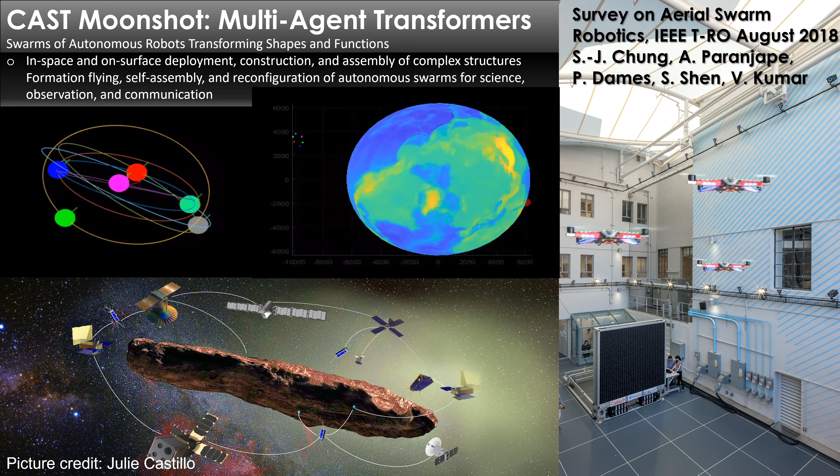Before I talk about the main topics, I'm going to briefly talk about my spacecraft swarm work, which I've been pursuing since my PhD work on formation flying. Swarm here means potentially more than 5 or 10 spacecraft. The number could be large, so your methodologies, algorithms, or autonomy technologies should be scalable to very large numbers, like tens or thousands of spacecraft.

I'm very happy to let you know that we have a potentially breakthrough flight demonstration. It's surprising that we have yet to see any formation flying demonstration involving more than 2 or 3 spacecraft doing full advanced autonomy and control. So we are working actively with JPL and a corporate partner to launch 3 CubeSats using a big spacecraft called Cygnus, by Orbital Sciences, now Northrop Grumman Innovation Systems, which is the main International Space Station supply vehicle.

After the end of the ISS mission, it's going to launch our 3 CubeSats. Along with this Cygnus, the 3 CubeSats will do autonomous reconfiguration using a very advanced computer, because we are not putting in the radiation-hardened computer, which is typically very expensive. Instead, this computer is an NVIDIA system, a very powerful computer with 256 GPU cores and a 2 gigahertz ARM-based processor. It's going to blow anything out of the water in terms of computational power compared to whatever computer you see in space now. It's going to be a real breakthrough technology demonstration. We are very excited about this.

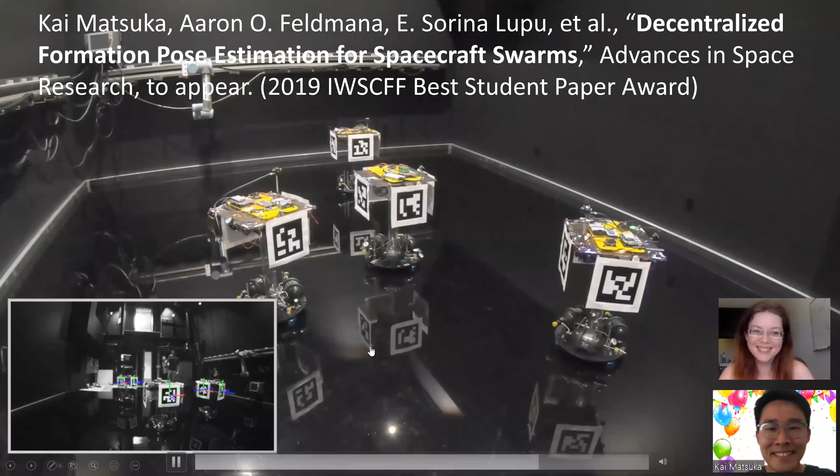So another important aspect of this method, or this project, is to figure out the safe and right path and trajectory for individual satellites, and there is no central agent. You can see that we are running our real-time optimal control algorithm.

Optimal control here means that essentially you have a certain time cost function, an integral of a certain cost function like fuel expenditure over time, while you avoid collisions and various state and input constraints, and eventually achieve the objectives. So my research group's work is kind of the first to use this sequential convex programming to solve very complex real-time optimal control problems involving multiple spacecraft.

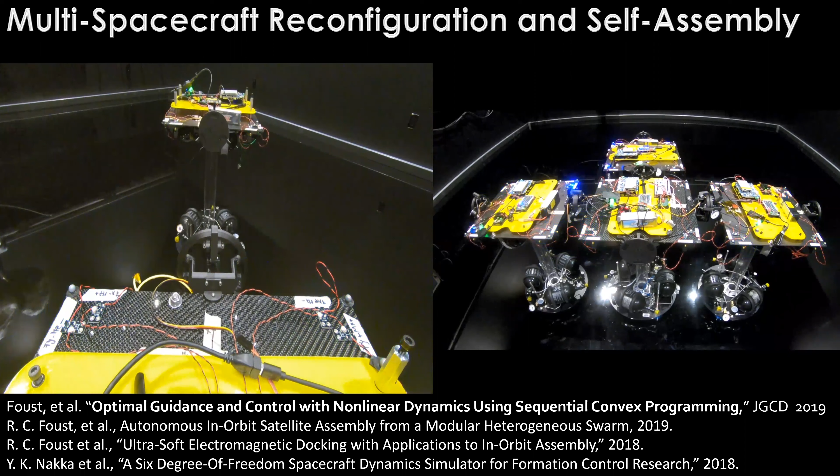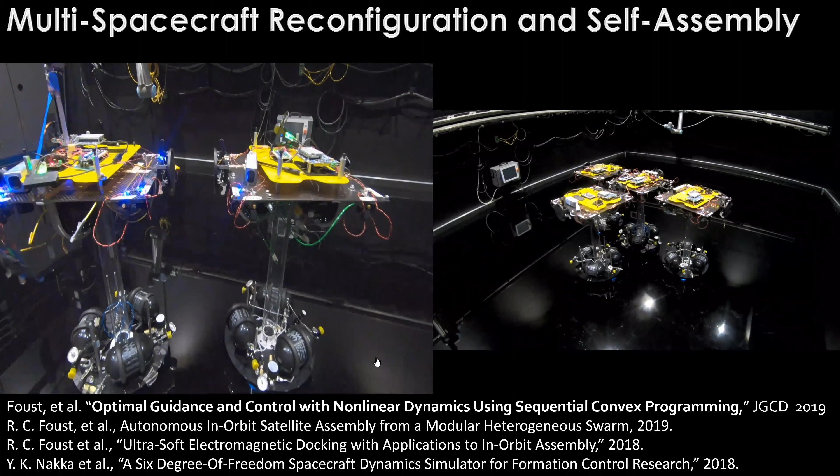We have a number of papers, and recently we extended that to more rigorously include nonlinear dynamics, and we also started working on stochastic dynamics with chance constraints, which I'm going to talk about soon.

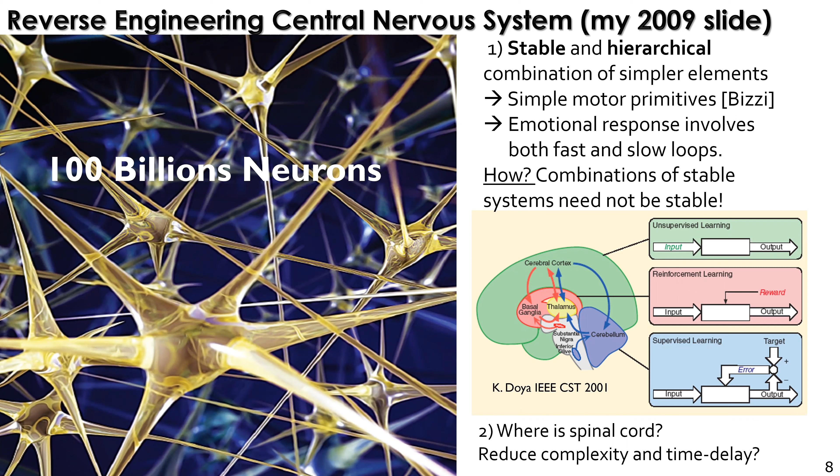So that was actually my point here, and that key idea is a hierarchical combination that can be used to really help this time delay we have. So that's the second point here.

So that led to some of my flapping flight research, because the idea was that at that time, in the robotics community or even aerospace community, everyone was looking at a very simple flapping flight model, not in terms of aerodynamics but mechanical and robot dynamics, where you only have flapping and pitch. It's basically an insect scale model. So what about bats and birds, where they have more than 30 joints on their wings? It's a very complicated mechanical robot, so how are you going to control those complicated joints?

The idea was to reverse engineer the central pattern generator on a spinal cord. That actually led to my Air Force Young Investigator Award and some best paper awards. We developed a mathematical model composed of coupled limit cycles, then used stability theory to prove we could control the phase differences between these multiple oscillators. This is actually the first paper that uses a central pattern generator based controller for flapping flight.

When you have multiple joints, not just flapping up and down, but lead-lag and independent left and right wing control, this still focuses on the philosophy of how you reverse engineer the sensory motor control, or the spinal cord part of the central nervous system, not just the brain.

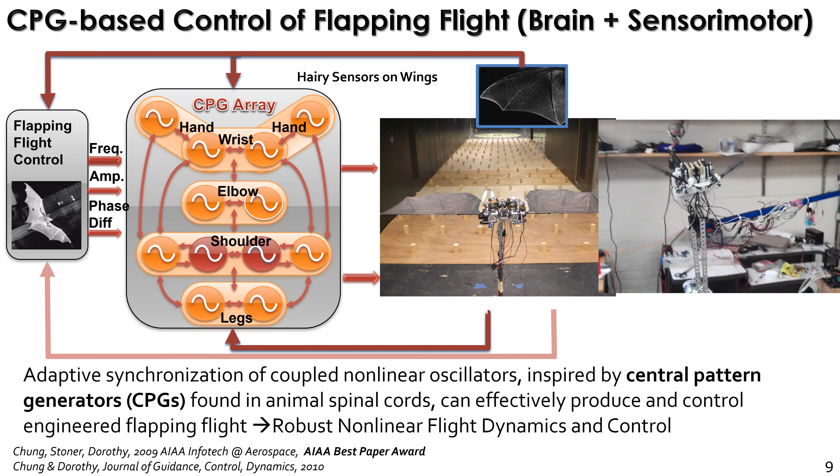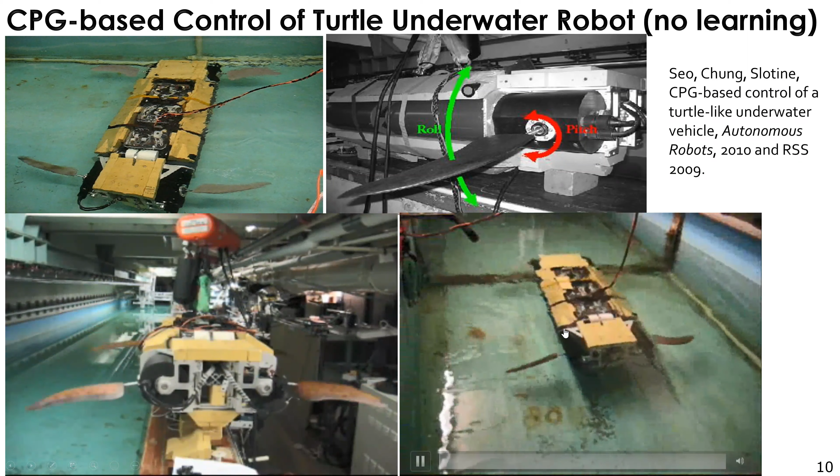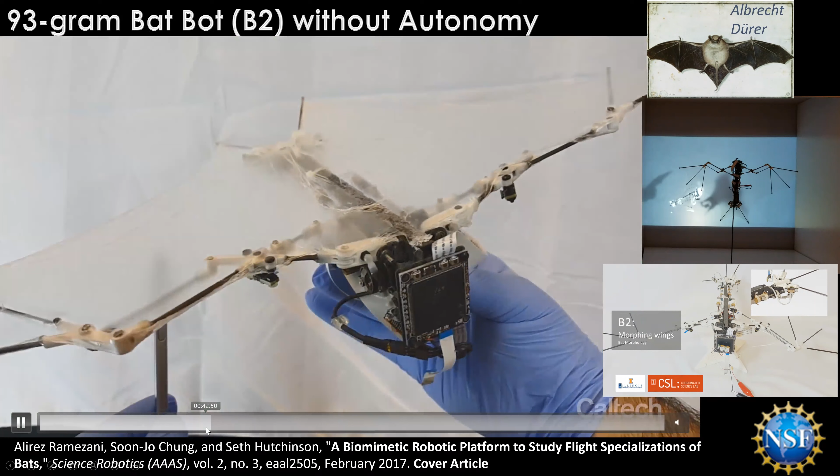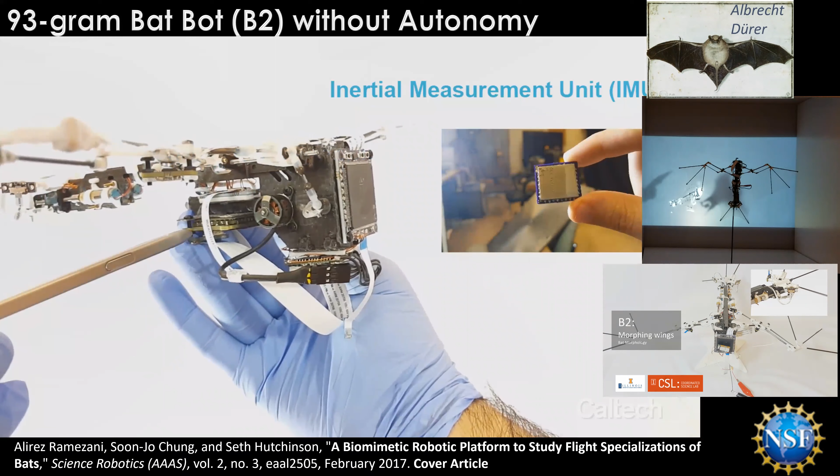So, skipping ahead, the end result is this Bat Bot. We wanted to apply some more sophisticated controllers. This Bat Bot is still, in my opinion, state of the art, because it only weighs 93 grams. It has a microcomputer that can do a low-level control loop, and as many as 6 fully controlled motors with encoder feedback for flapping and wing folding, independent left and right wing folding. That's kind of my culmination of investigating a bio-inspired control approach. We designed a very nice nonlinear controller, but it didn't really have a learning part or a sophisticated autonomy.

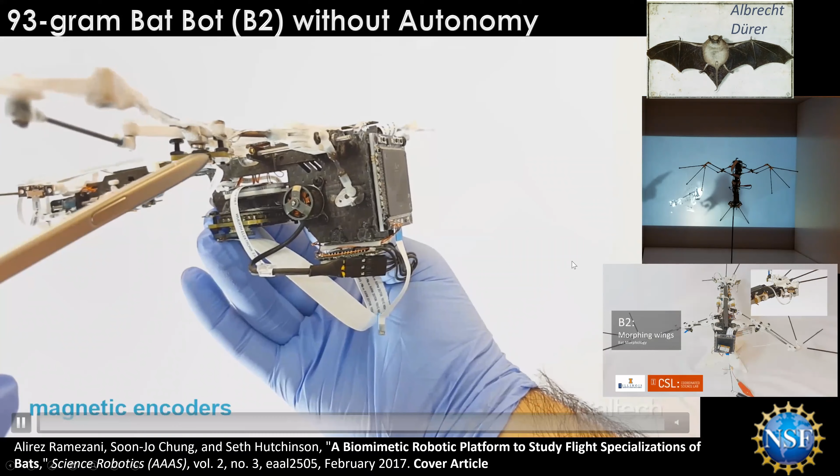I actually wanted to show this one, since we have a lot of fluid mechanics colleagues. With Kenny Breuer at Brown, I was invited to a Spanish program called El Hormiguero, which means the ant, with Hollywood actors, to present our robotic bat.

So this is the old approach. We have a feedback control here, and a plant, whether it's linear or nonlinear, and a separate motion planning. The idea was to design a controller and check the stability, whether you can check the eigenvalues. Checking the eigenvalues is essentially the same as finding the Lyapunov function for a nonlinear system. Then we can have an input-output stability analysis, like LP stability for a linearized system.

So my next step is how can you integrate all these different pieces, and what about learning? This is more of a robust control - you can add adaptive control, but what if you have a certain block, highlighted by G, that's either unknown wind-based disturbance in terms of aerodynamic force and torque, or some unmodeled structural vibration causing additional disturbance entering your system? It could be anything. How can you add learning so that you have both feedback control and estimation, and at the same time motion planning, which typically doesn't benefit from the learning-based process? I'm going to talk about the ramifications of that.

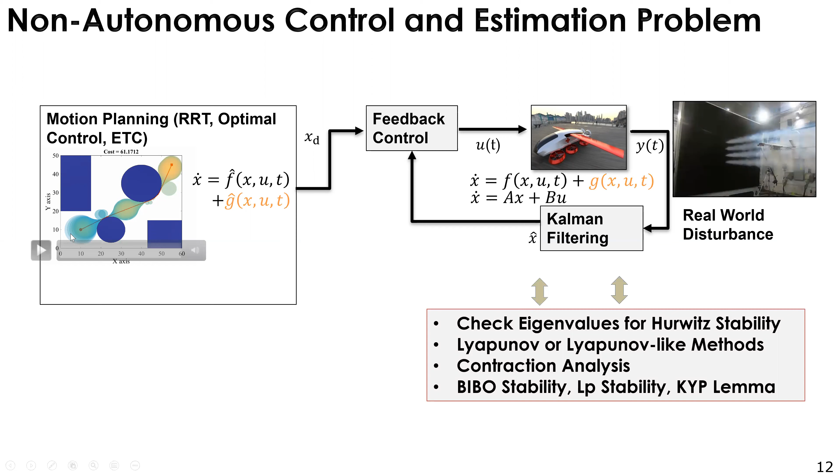So this is my proposed approach, and I shouldn't say my, because this is some of the approaches that we are pursuing along with our CAST colleagues, and a lot of students are working in some of these intersections.

So there is a learning, offline and online learning block that can help find a better trajectory for motion planning in terms of collision avoidance, safety, and minimizing fuel. Also, you have to have a very stable and safe nonlinear feedback controller. So we are benefiting from some recent updates that can analyze the nonlinear and stochastic dynamics of both the nonlinear control and estimation problem.

Estimation, if you're not familiar with this kind of control theory, is basically figuring out your state, x hat, for example. Control is figuring out u, and learning is about whatever parameters, disturbances, and unmodeled errors exist in your system—estimating those either in real time or offline, and you can combine the two. That's what I'm going to talk about.

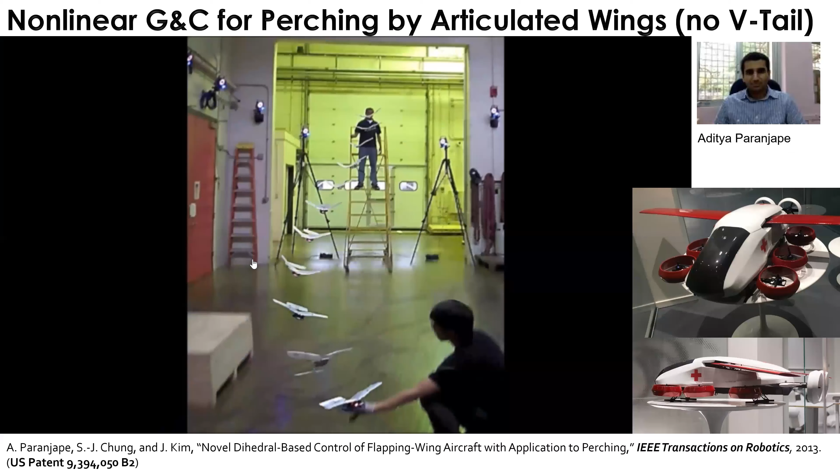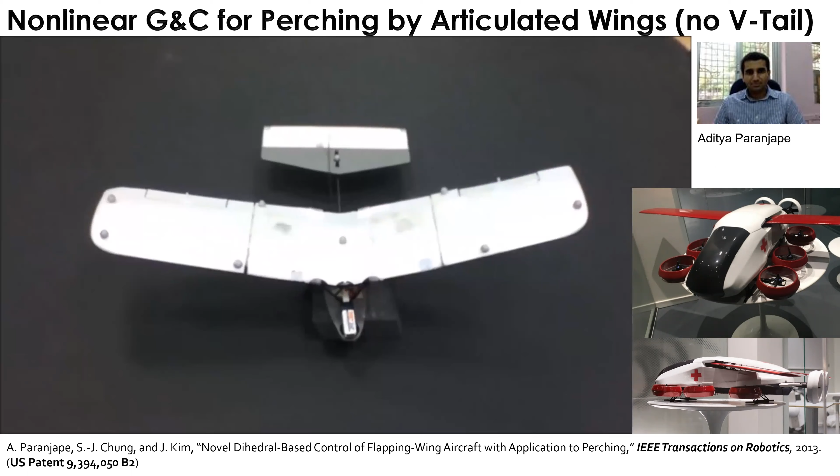The idea is basically dihedral. Dihedral means the wings are angled upward, but you can actually move the dihedral angle and control it. It's like flapping, but not in an oscillatory fashion. If you can control the left wing dihedral and right wing dihedral separately, you can use that difference to generate yaw.

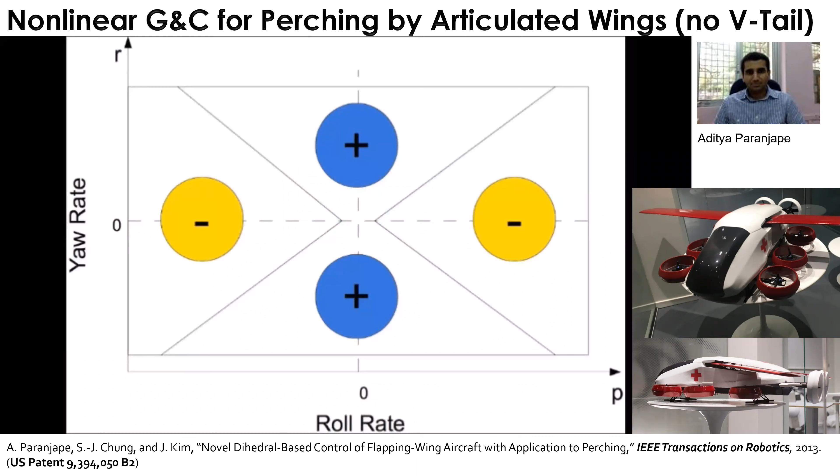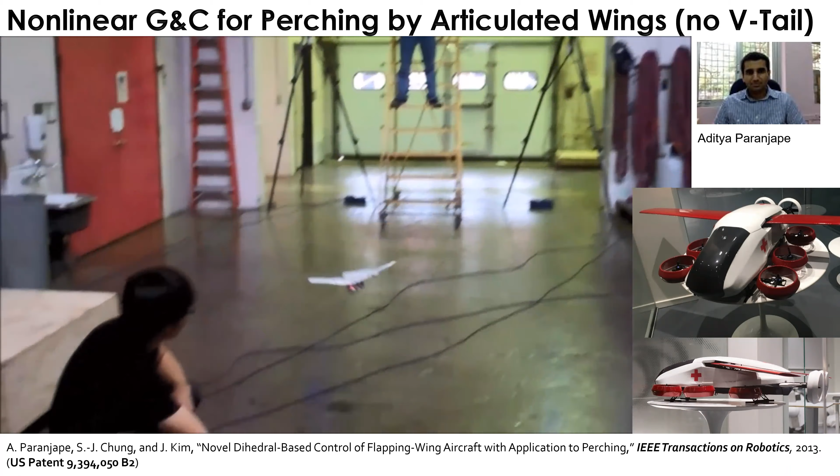So this is actually the first real robotic experimentation and controller demonstration of a vertical tailless aircraft, and then perching—so it can automatically figure out the location, do control, and land gracefully on a human hand.

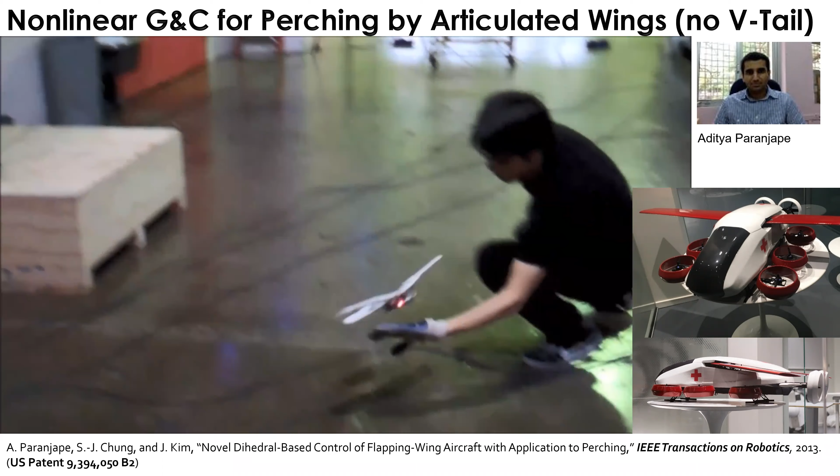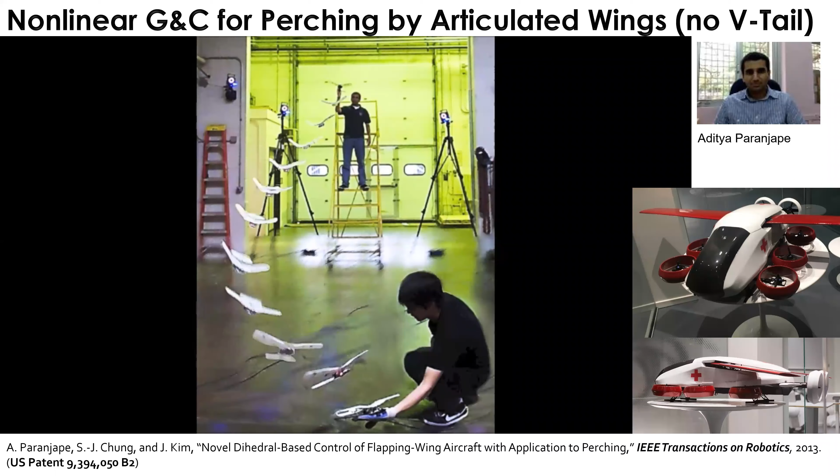This involved very sophisticated control design, combining guidance and feedback control with proven stability. We used a technique called nonlinear dynamic inversion and then singular perturbation to do a hierarchical decomposition. It looks beautiful, but my point is that it really lacked more robust autonomy and a learning-based block, because it didn't try to learn any uncertain aerodynamic forces or location changes of the target.

So how can you add this kind of learning block into this sophisticated nonlinear flight control design? That's something we are pursuing right now.

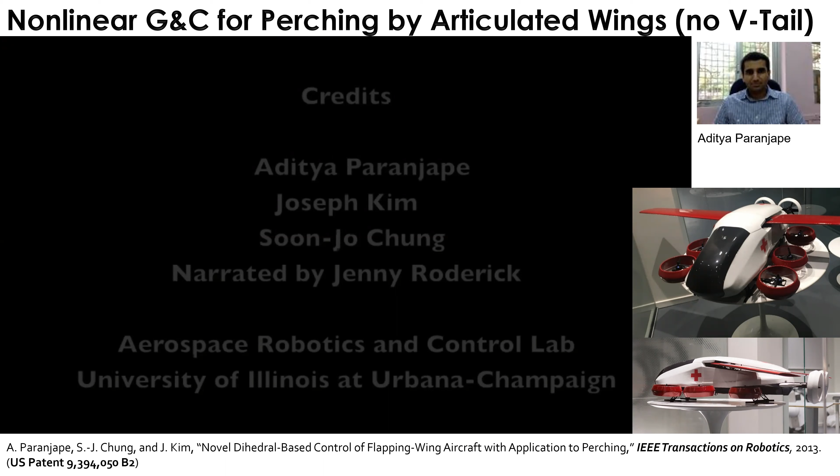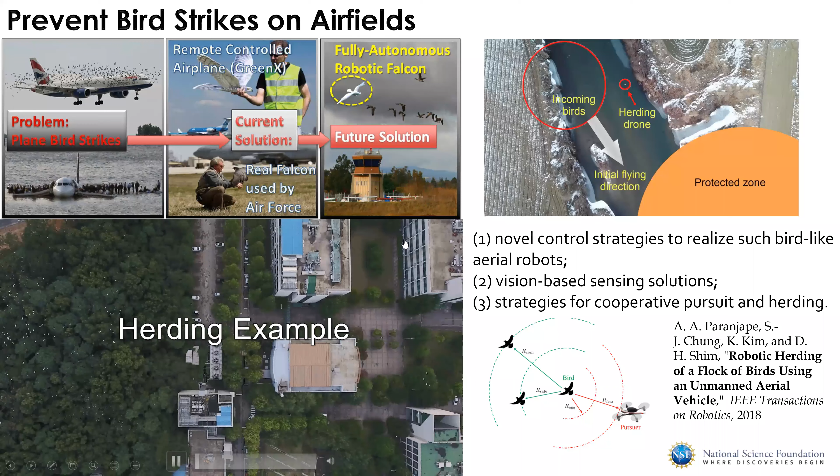So I'm just showing you prior work. I'm taking this opportunity to also talk about swarm and multi-agent systems, either for spacecraft and so on—combining this flapping flight dynamics that I'm now familiar with, and how you control this drone that looks like a bird.

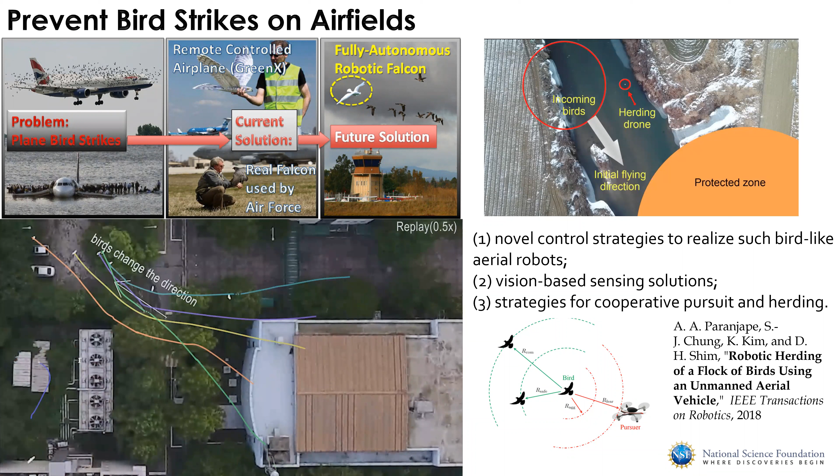We got NSF funding to actually find a solution to herd flocks of birds that tend to fly around airfields, causing accidents. As you can see with the miracle on the Hudson River, they had a spectacular landing because they were lucky, and the captain knew how to do a gliding flight.

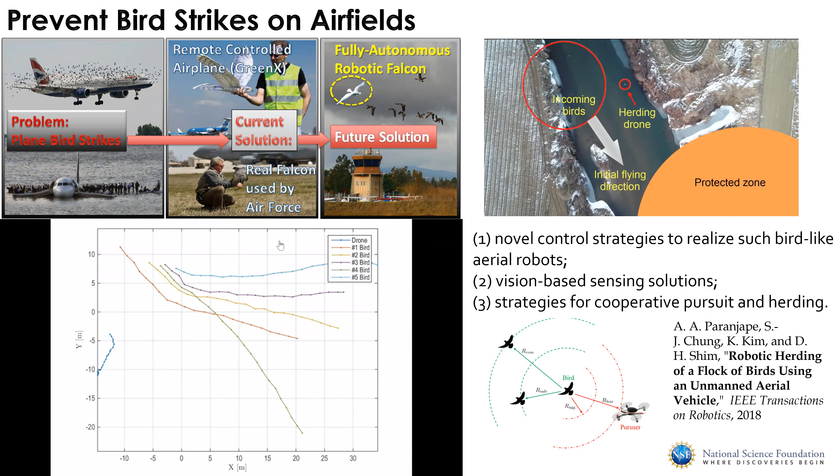So in this paper, we presented a mathematical model of flocking dynamics of birds, and how you can reverse engineer a mathematical model of the flock's behaviors, like cooperation and following leaders. How can you add an intruder to herd the flock of birds in reality? This is the first real demonstration of a robotic drone herding a flock of birds using our mathematical algorithm.

Obviously, I wasn't sure it was legal to do that in the US, so we actually collaborated with an international institution for this.

So going back to the main message: how do you combine these learning pieces for both guidance, which is motion planning, and feedback control and estimation? We are going to start with motion planning, meaning the optimal control and guidance problem. I'm saying that you can use optimal control to solve the motion planning problem.

So the typical way of solving this problem is that you have a cost function, either minimizing fuel cost or energy cost. You can add additional cost functions, and you have highly nonlinear dynamics, input constraints, and various safety constraints, typically like collision avoidance, meaning you have to maintain sufficiently large distance between agents. This is a typical problem: you start from certain initial conditions, and then you typically give a final terminal time set.

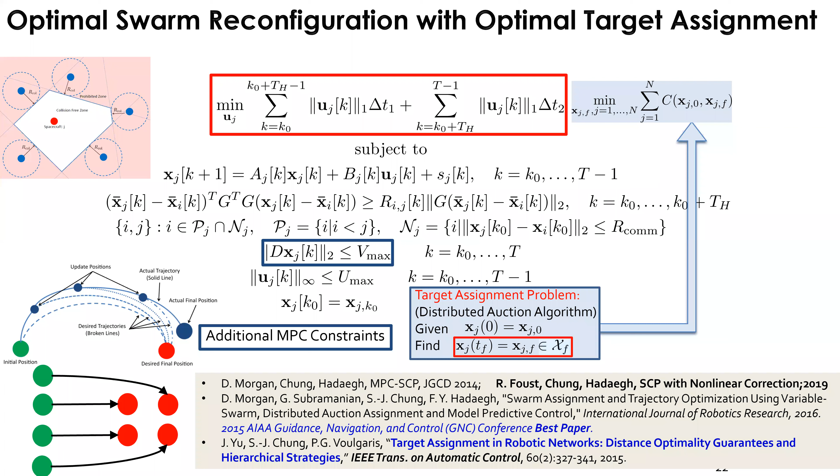We have a bunch of extensions including stability proofs and convergence. One thing to mention is that when you have multiple agents, the terminal constraint is not given — here I mean the target assignment. You can combine that target assignment problem using existing methods like the Hungarian method or game theory-based methods. Basically, for each spacecraft's initial position, you figure out the best optimal terminal point to achieve your goal, and that can be viewed as another optimization problem.

But you have to simultaneously integrate both methodologies of optimal control — basically finding the path. I'll mention this word, path or trajectory, multiple times in this talk. We have to combine these multiple trajectories with the initial and terminal conditions. That's the target assignment problem, and we now have a combined methodology to do that.

One thing to mention is that you are finding the single point, and that's another decision problem. That's actually one example of the hierarchical combination I started talking about.

I talked about the central nervous system and brain, how these complicated machines or animals work, because you have very complicated networks that are essentially hierarchical. They can make fast-time decisions and slow-time decisions, fast-time movements and slow-time movements. So from the theory of stability and dynamics, we have perspectives we can leverage for achieving this hierarchical combination of very complicated dynamics.

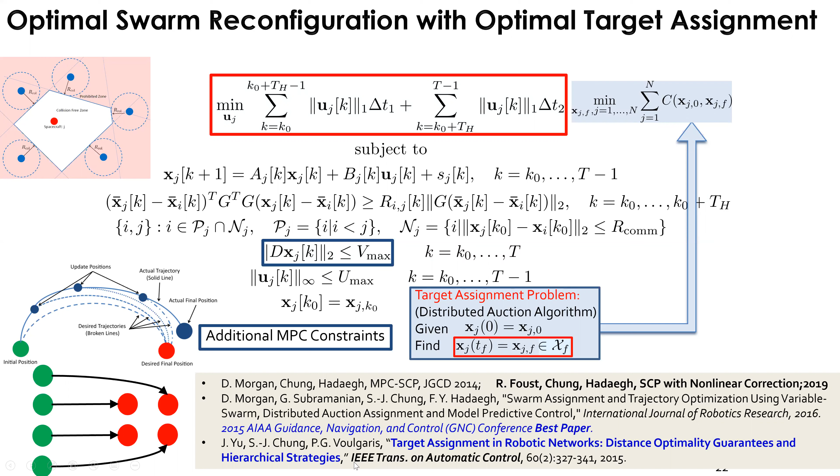This target assignment problem is essentially a learning problem or decision-making problem that can run a little slower, because you only need to figure it out at one time step, the terminal time, instead of many independent time steps between initial and terminal time. That's another example of how you combine learning-based decisions with optimal control, feedback control problems.

The end result is that you can generate many complicated shapes from whatever initial condition, and you can lose some of them — they can autonomously figure out where to go in a collaborative fashion. Those dashed circles indicate communication radius, where you can actually communicate with other agents.

Another extension: in order to make this a convex optimization, but sequential, so you can handle slightly more non-convex constraints or dynamics including nonlinear dynamics, we use hyperplane approximation. You start drawing hyperplanes to avoid collision, but that may be too conservative. So what we do is expand the collision avoidance like spheres, which look like tubes, expanding tubes. You can then define the collision-free, safe region.

Again, this is illustrative — you're moving around a very cluttered environment, and you want to figure out the best optimal collision-free path. Then you can use a heuristic approach like RRT or tree-based approaches to find a certain path, and then start expanding spheres along that path. Using the dynamics, sequential convex programming, or an optimal control solver, they can guarantee feasibility and dynamics constraints, satisfying the optimal solutions.

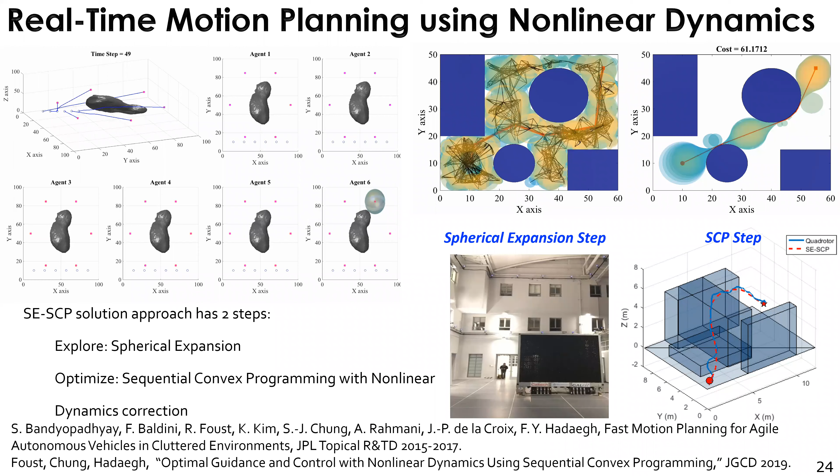So here I'm going to talk about how we can add a learning part. One extension is that I only talked about deterministic nonlinear dynamics. Again, if you actually add nonlinear dynamics—I'm not talking about the stability problem—you have an optimal control.

The typical way of doing that is you linearize the nonlinear dynamics, but you do that sequentially. You start improving the linearization errors, but there's no way you can actually handle nonlinear equality constraints, because a nonlinear equality constraint means it's non-convex, right? So there are several extensions of doing that using the nonlinear correction paper.

So what Yashwanth did was look at how you actually use both stochastic nonlinear dynamics and chance constraints. Now your collision avoidance constraint is formulated as a chance constraint—a probabilistic constraint. So what's the chance or probability of disobeying or violating this particular collision constraint? You write that as a chance constraint, and then solve this very complicated optimal control problem by turning the stochastic differential equation into a deterministic nonlinear equation using polynomial chaos approximation.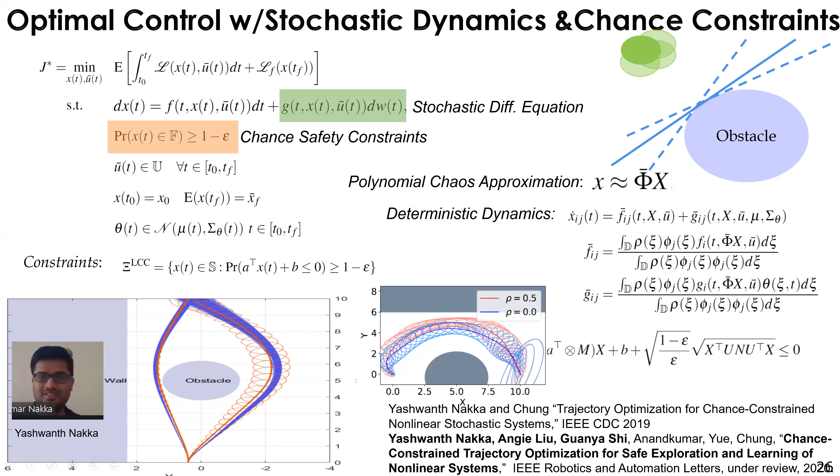So now I'm talking about a new application, before I go into some of the theory here.

This is a flying ambulance, and it's also one of the most important moonshots. When I luckily got involved with CAST, I looked at all this exciting research going on in various aerospace institutions, and then tried to figure out what's the next step.

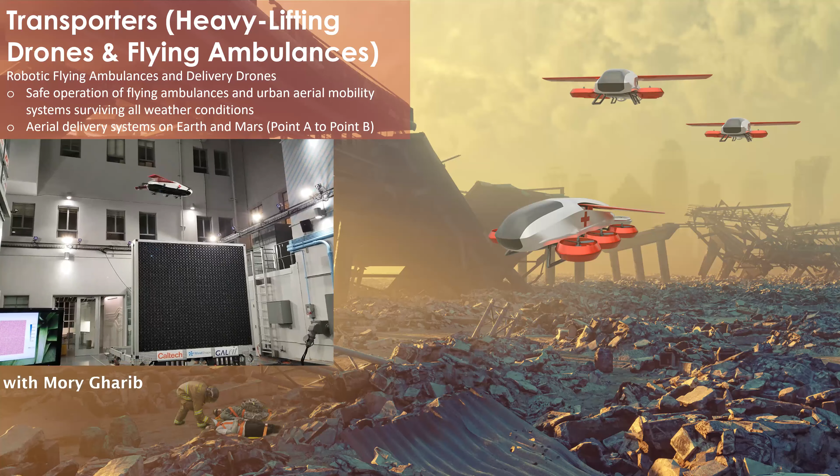We have drones with wings, we have a bunch of quad rotors, and we have helicopters. So I thought maybe, by building on advances in electric motors and drones and multiple propellers, you could combine the wings and distribute the propellers so you can get more range than just quad rotors, and also it's much safer than conventional single-rotor or double-rotor based helicopters—you might recall the very unfortunate and sad crash of the Kobe Bryant helicopter.

Helicopters are well known for unreliability, because you essentially have to rely on a single rotor or a couple of rotors for safety. Here, the objective is that instead of having these kind of meat grinders, you have distributed propellers that can actually get you safety—how you connect point A to point B safely, either delivering packages or even humans.

Under any weather conditions, we basically benefit from this very fancy 1,296 computer-fan-based fan array to generate all these different sorts of wind disturbances.

So I want to reflect on why flying cars - the fast flying ambulance is one example of flying cars. The idea here is that I wanted to actually contribute to AI and autonomy of self-driving cars, and this is an important problem. But if you know how to find a solution to make these autonomous flying cars, I thought that could also be applied to self-driving cars.

But more importantly, I don't know when we can have fully autonomous car networks, because eventually you cannot completely get rid of humans - the pedestrians and cars driven by humans - and that's going to cause a lot of problems. Although you might have very advanced intelligent cars driven by autonomy engines, you might still get into conflict with cars driven by humans. So why don't you actually try to utilize the three-dimensional world? That's one motivation for self-driving flying cars instead of self-driving cars, where we can do a lot of autonomy-based research in the aerospace world.

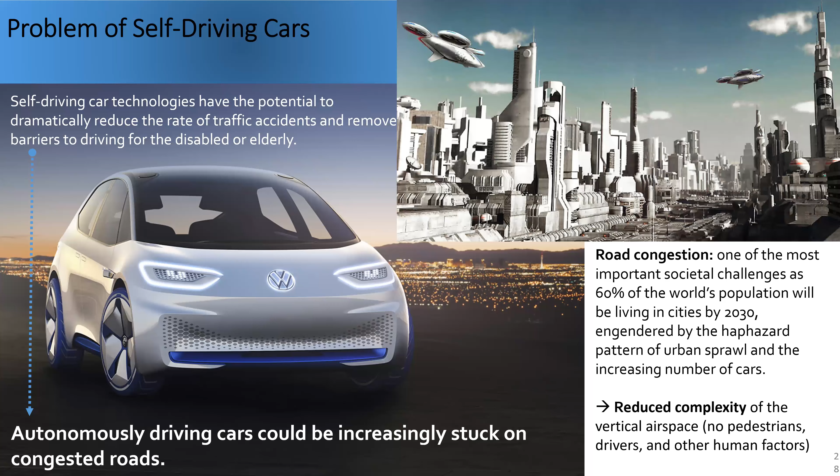So our vision is to develop drones that potentially have multiple propellers for robustness, and might also have multiple hybrid actuators and control surfaces from the wings. Then you have to have autonomy that can connect point A to point B, delivering certain packages. But do you have any delivery drones that can survive any weather conditions? We don't - try flying a drone in heavy wind, it's still very challenging. Once you start carrying a human passenger, you want to make sure your drones are extremely safe and robust. So we're going to show some of our CAST and machine learning and control research problems, and how they relate to solving this kind of autonomous and safe drones that can even carry humans.

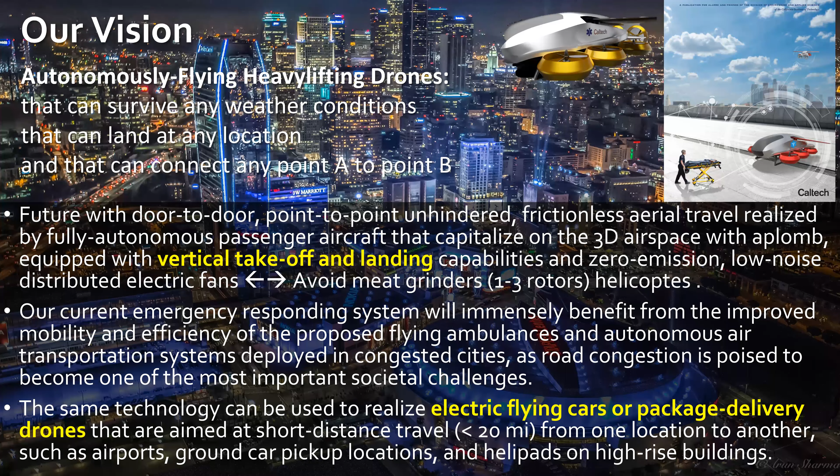One problem is that with multiple propellers, we know the aerodynamics - the thrust coming out of the propeller is proportional to the diameter to the fourth power, whereas this is proportional only to motor speed squared. So I can see the benefit of expanding or increasing the rotor size, and we might end up doing that, but we want to make sure each rotor blade is less harmful, less intrusive - it's not going to be a meat grinder.

At the same time, have you known that if you fail one random propeller out of a hexacopter, it can easily destabilize the system? So you need a certain configuration - either tilting or a certain right controller. So we are demonstrating a fault tolerant controller that can restore stability in the presence of random rotor failure. That's only possible with multiple rotors.

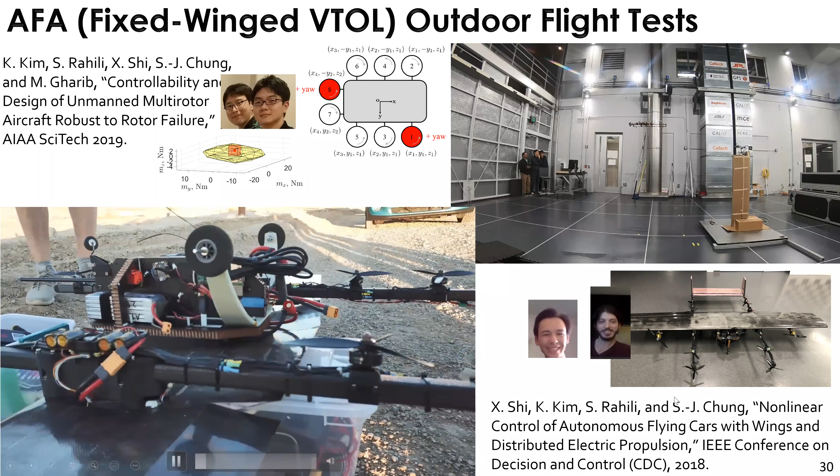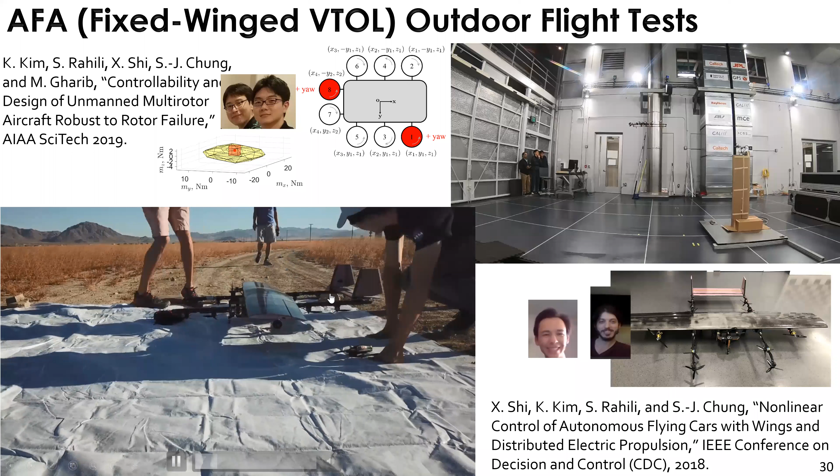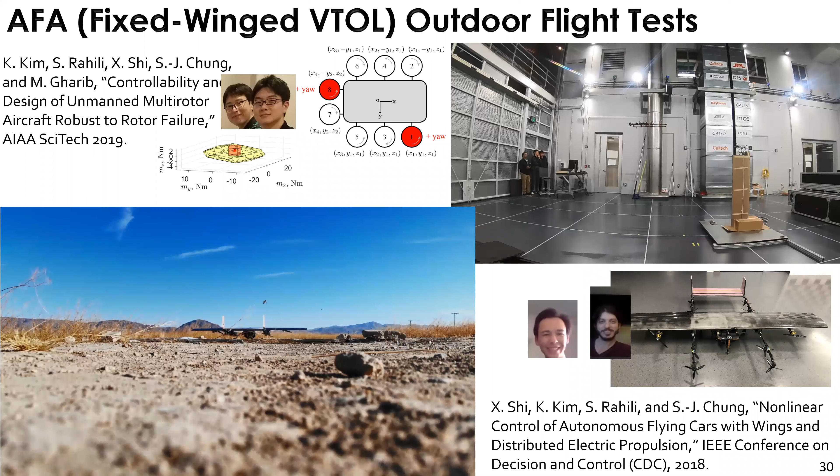You know it's illegal to do that because you have to maintain line of sight. You can see this kind of mini car in the video - we borrowed the car, and people including Reza Nemovi and Patrick were following the drone to maintain visual line of sight. We fully demonstrated this transition flight, going from taking off and hovering, to flying like a fixed wing, and coming back.

So that's one of the technologies, but obviously that was happening in very benign weather conditions with no uncertainty - we had a relatively controlled environment. So how can we actually improve this kind of robustness, and what if it's carrying unknown mass, unknown heavy mass? Then you have to make sure you can accommodate this kind of change in your model. So that's roughly the problem.

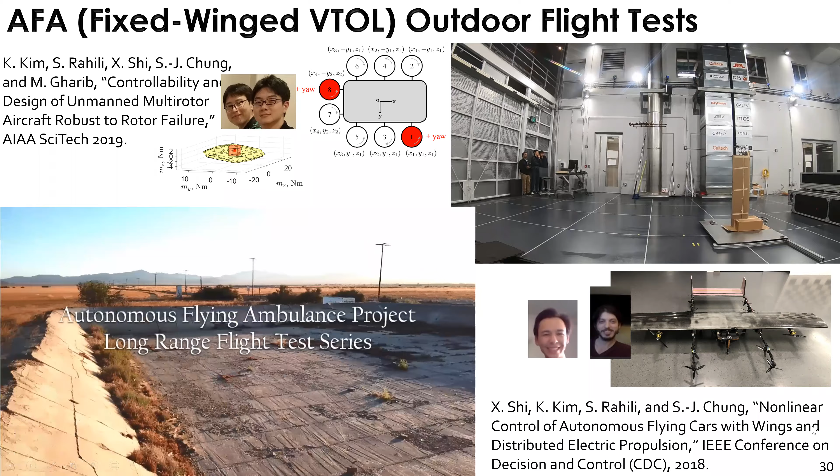So this is kind of an evolution of our previous flying ambulance model, including some of the recent autonomy testbed. I have to acknowledge that some of the earlier designs were done by Kyunam, my PhD student. And we are currently working on AFA 4.0, which improves on all the lessons we learned out of this exercise.

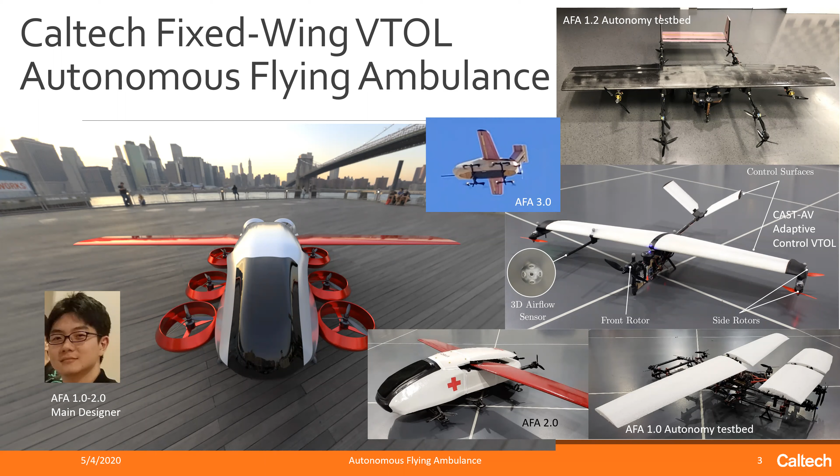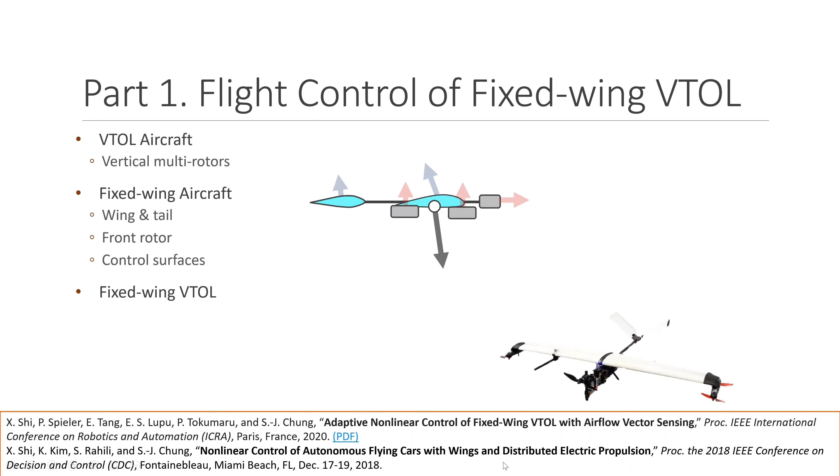So again, some of the control problems, we have to figure out this transition flight. If you recall, is it Osprey, the Boeing tilt-rotor aircraft? Many of these challenges of this kind of VTOL with a fixed wing are caused by this transition flight and instability.

So we have a number of algorithms that can actually handle stability so we can do a very smooth transition. This VTOL fixed wing example is actually a collaboration with AeroVironment and Phil Tokumaru, who is a GALCIT PhD under Dimotakis. Our students actually developed a 3-dimensional flow sensor that can measure the angle of attack, the flow speed, and side slip angles.

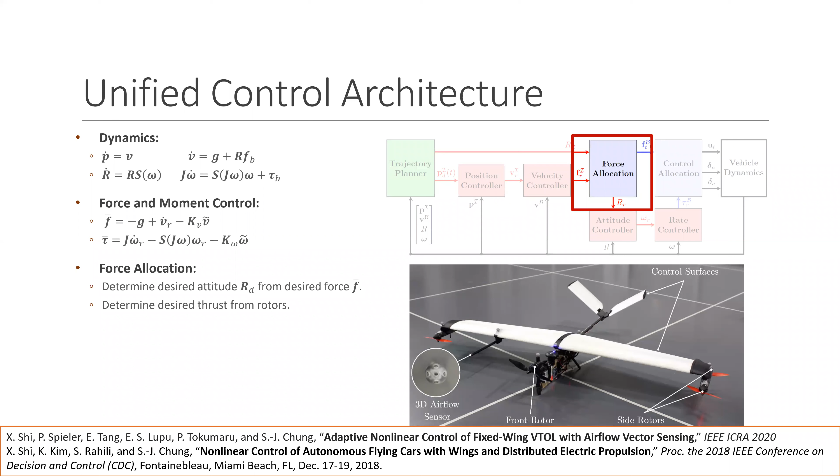Once you measure those, that's fine. You remember this, like the Boeing accident, the crash - you can measure angle of attack and so on. But the thing is how you want to measure and incorporate this measurement, not just angle of attack but side slip angles, and then use that for learning-based flight control. That's what we did here.

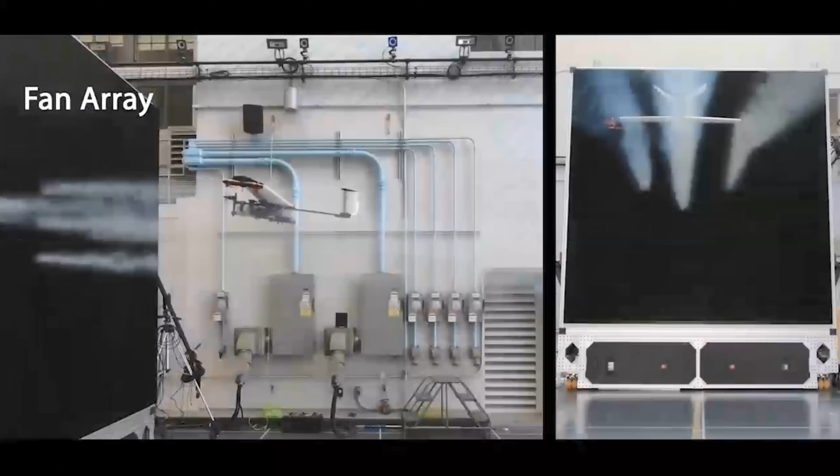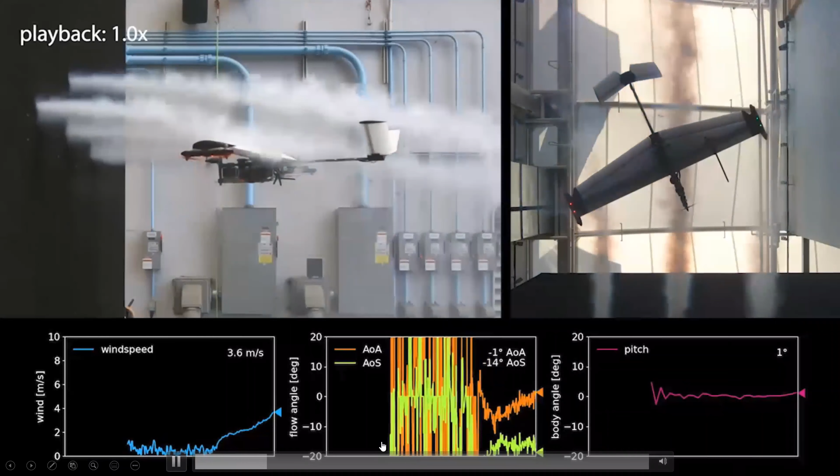So we are trying to adapt these learning-based flow measurements that can lead to real-time learning. Here, instead of a full-blown learning-based method, we are only using adaptive flight control. But this is quite promising in the sense that it can handle various kinds of disturbance.

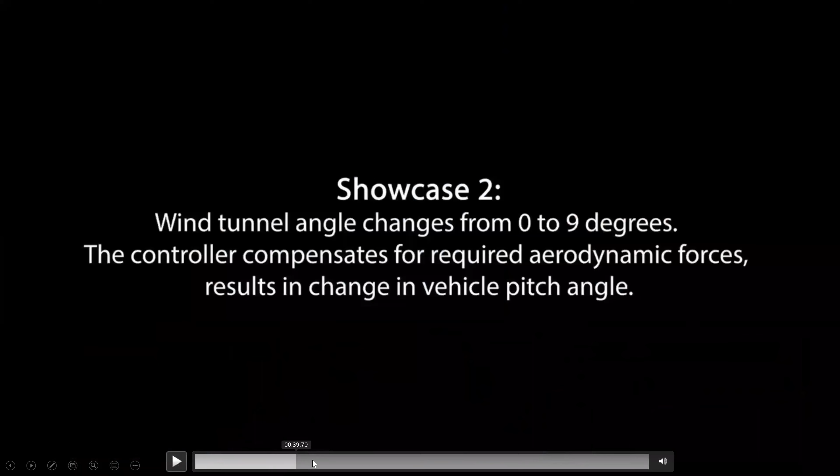In order to actually generate this disturbance with varying speeds, because we don't have that capability yet, they came up with the idea that they can change the tilt angle - you can see that, right? Thereby actually changing the flow angle around the aircraft.

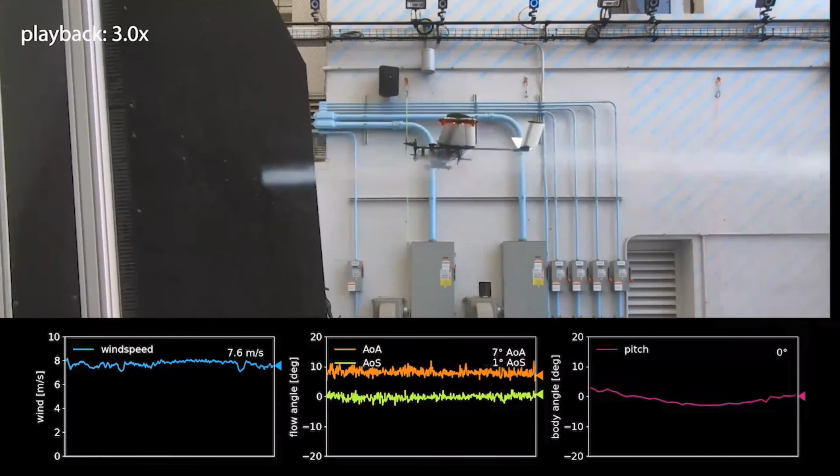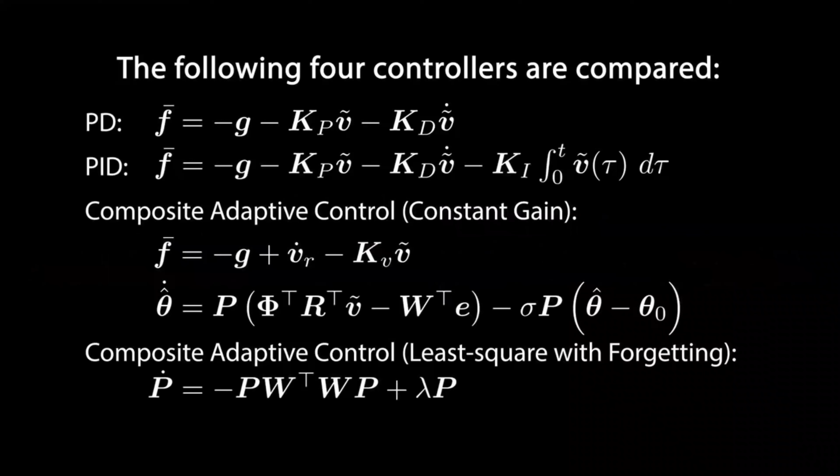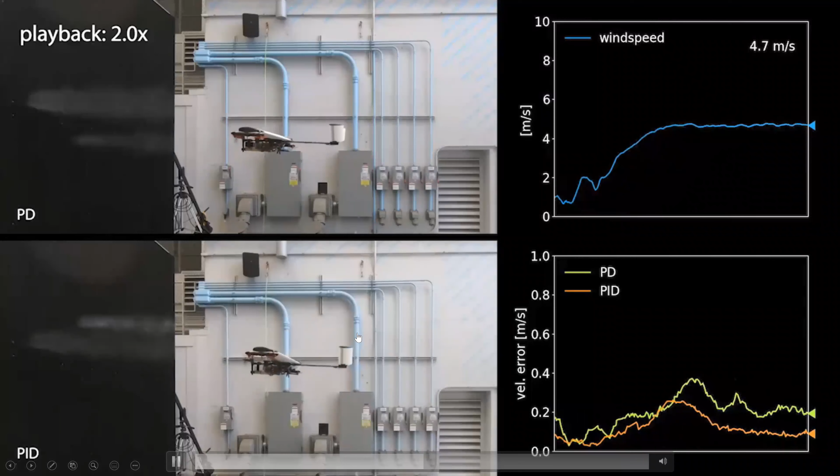We actually demonstrated one of the first full transition flights from hover to fixed wing flight, because any rotorcraft can hover like that, but this is us flying it as a fixed wing aircraft based on wind generated by a fan array - almost like a wind-based treadmill, which is kind of awesome. It shows the benefit of this kind of test bed where we can do even transition flight between VTOL and fixed-wing aircraft, using this test flight arena led by Mory and his students. This is also an exciting project.

Okay, so you develop a flying ambulance, or modify that for maybe the next generation Mars helicopter, but your Mars helicopter may land on uneven or very challenging terrain. So the key idea here is how you combine - like I combined fixed wing with multi-rotors for VTOL - we're trying to combine the propellers with legs. Legs can be viewed as locomotion actuators, or as an adaptive legged landing gear for a flying ambulance or Mars helicopter. So how do you do this flight control with the leg control.

So we are actually generating some exciting results. Now it can work very well, but we are writing a paper. So we have roughly maybe 10 or 15 minutes.

So with all these challenges, I now want to talk about how you combine machine learning with flight control. People have used this method, but typically machine learning or AI are unfortunately synonymous these days with a big complex neural network, either a deep neural network or, for vision problems, a convolutional neural network.

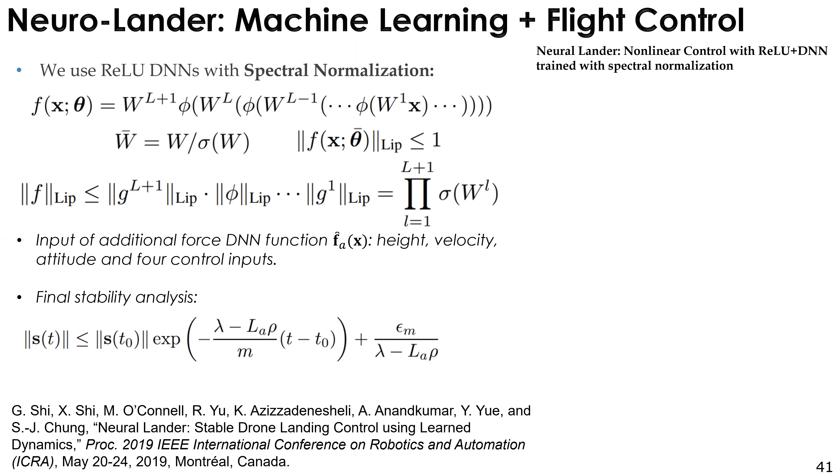What he did here is use a particular technique called spectral normalization, which existed in the machine learning community, to bound your black box. Working with Anima's group and Yisong's group, our PhD students from GALCIT and CDS - Wanya, Kyunam, and Michael O'Connell - developed a very stable flight controller that can use machine learning to learn the unknown dynamics. Using spectral normalization, once you know how to bound your black box AI or deep neural network, you can use that norm bound to design the stability proof for the nonlinear system. So that's exactly what I did.

The problem here is actually very interesting because it's an aerodynamics problem. Once you land your aircraft, whether it's a fixed wing aircraft or a drone, you have a ground interaction, which is called the ground effect. The simplified, non-dimensional ground effect model is only a function of a certain coefficient and the distance, z, only a scalar variable distance.

So what you have done is train a prediction of the full three-dimensional ground effect force and torque, as a function of three-dimensional position, not just distance or z height, but also x, y position and velocity, x dot, y dot, z dot, because you might experience different ground effect when approaching the ground faster, and also attitude, because landing in a different orientation might generate different ground effects.

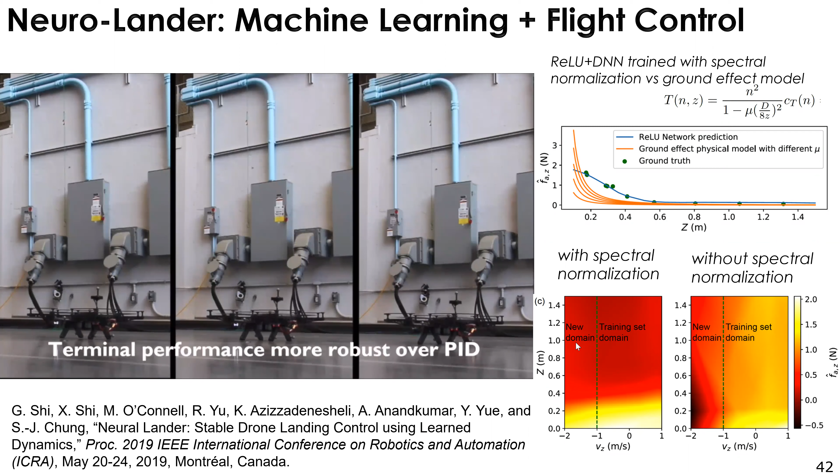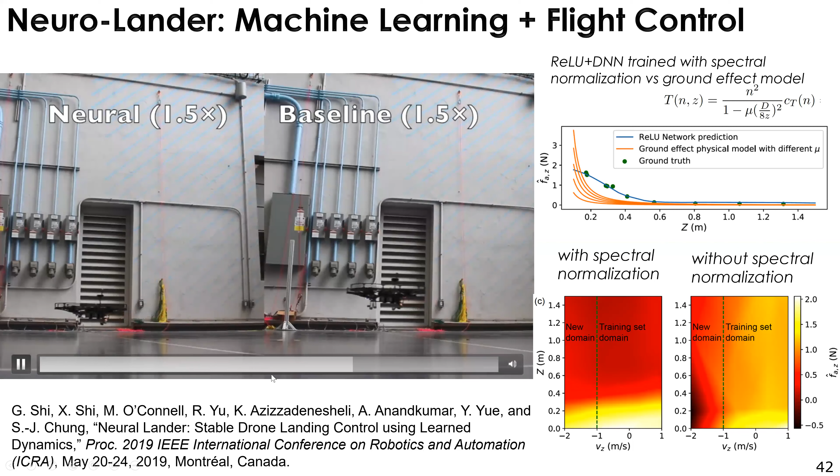So the end effect is that you train a prediction of unmodeled ground effect forces and torques, and add that to your controller. As nonlinear control experts, we can design a nonlinear tracking controller that can track various trajectories, including very close proximity scanning of the ground, as you can see here. This is not possible with a conventional controller, and also even going over a table, because all of a sudden you experience ground effects, and our neural lander controller can easily handle it.

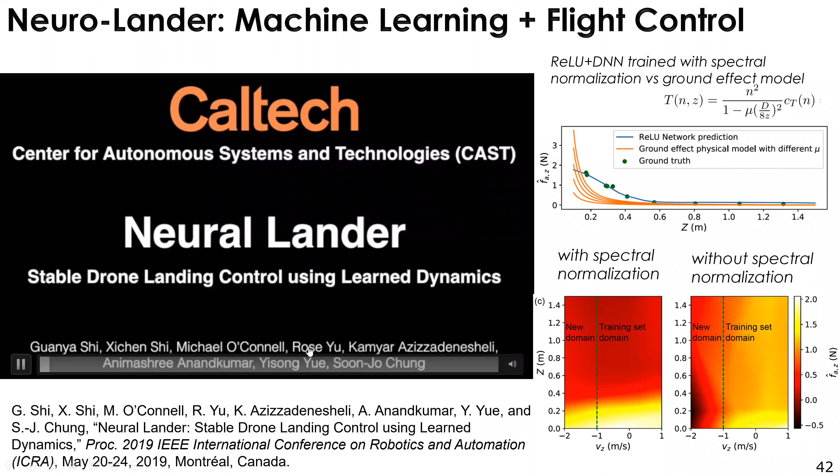But this is offline control, where you train a very complicated deep neural network to predict the ground effects. The next step involves two extensions. How can you extend this prediction of aerodynamic interaction to neighboring aircraft, for swarms of drones that have to fly in very close proximity? That's called neural swarm. This is another paper with Guanya, my postdoc, in collaboration with Yisong.

So we trained the network. It looks like this video is not working, but that's fine, because you've essentially seen this before, with 16 quadrotors flying in random motions and then controlled.

We designed the neural network to be permutation invariant. What I mean is that when you have two neighbors, it doesn't really matter which neighbor is which. In that sense, it has to be permutation invariant, and we leveraged a particular technique called deep sets to achieve a permutation invariant neural network.

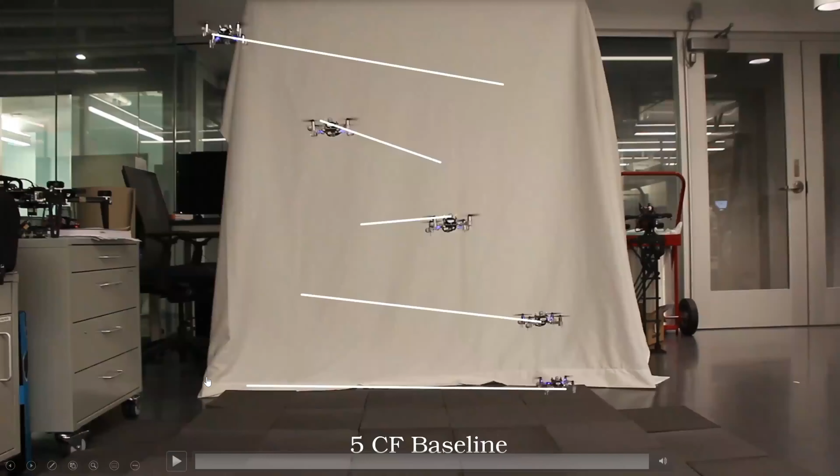That's fine. The result is that we have path followers flying much closer to each other, much better, because you don't see this kind of aerodynamic interaction anymore, since we can correctly predict the aerodynamic interaction when drones fly close to each other. We have an experimental video, but sorry, it's not working.

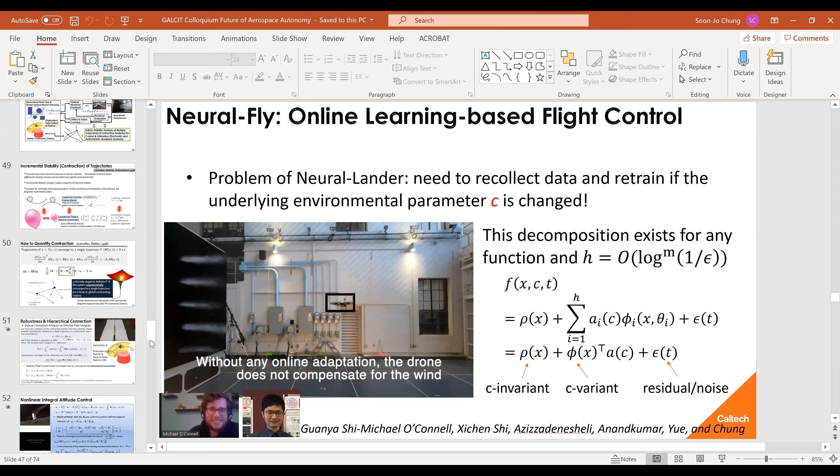So we'll see where this heads, but I'm very excited about this future direction. In the more mathematical part of this talk, I discussed a lot about stability and proving that you can bound your AI black box output, and then you can do real-time motion planning using sequential convex programming.

How can you actually tie all these things together using some stability theory? That's actually basically contraction theory. Many of you are familiar with a nonlinear controller.

Essentially, the Lyapunov function is like this: you can find some scalar function, and if that scalar function is decreasing over time, your system is stable. It's almost like checking the eigenvalues of your linear system. What's new is contraction theory.

It's actually motivated by fluid mechanics. You get the differential of a path interval. If the path between these trajectories is contracting in terms of volume, then your system is exponentially and globally stable. Globally means that from any initial condition, they are coming to each other.

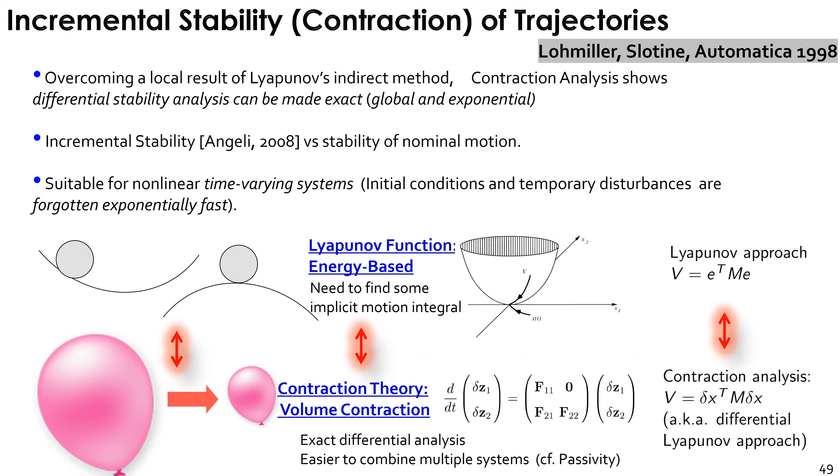As opposed to this Lyapunov-based approach where you characterize the stability of an equilibrium point, we're concerned about multiple trajectories here, because we have many different trajectories from swarms of spacecraft, or a single spacecraft tracking a desired trajectory - you have your own trajectory and a desired trajectory, it's a tracking control problem. So how can you quantify the contraction?

It's a mathematical notion, but the bottom line is very simple: you get the generalized Jacobian over your linearized dynamics. We know the linearization technique from the Lyapunov indirect method - it can get you only local stability around local equilibrium points.

The challenge is how you find this M or theta - you have to find that. It's almost like a quadratic Lyapunov function, but what's new is that your Lyapunov function is always quadratic like this, with delta x, a virtual infinitesimal displacement of your trajectory. So your delta x tends to 0, and any solution, as you can see in this diagram, will converge to a single trajectory. This is the method used to characterize the stability of multiple trajectories.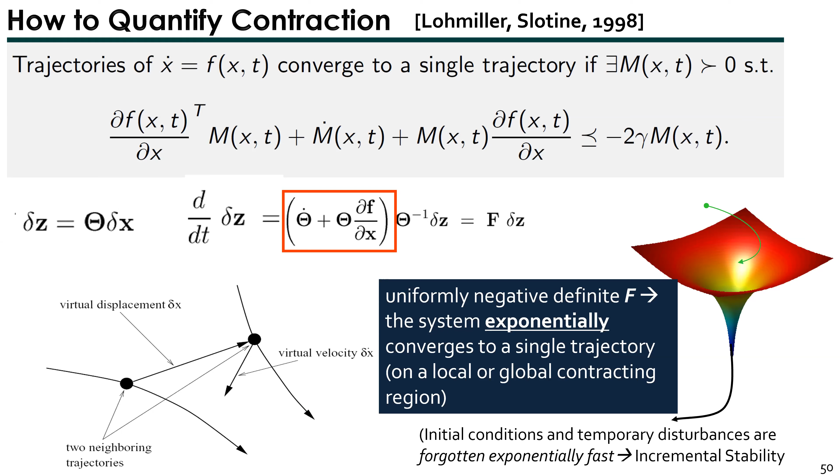Each trajectory they are converging to can itself be unstable - it doesn't matter for this. What you care about is that those trajectories converge to each other.

We find this Riemannian metric-based shortest path integral, defined by R, which is the integral of delta Z norm from the previous slide. If you can show that R is exponentially converging to 0, then all the paths, all the trajectories from this nonlinear differential equation x dot equals f of x and t, with a disturbance d, are converging to each other. Without a disturbance d, they converge to each other perfectly, exponentially fast; otherwise it converges to a bounded ball.

Remember the bounded ball I mentioned - that's kind of a steady state error - can actually be used to generate a tube. That tube is your uncertainty state robustness bound coming from your nonlinear stability analysis. You can feed that back into your learning and optimal motion planning.

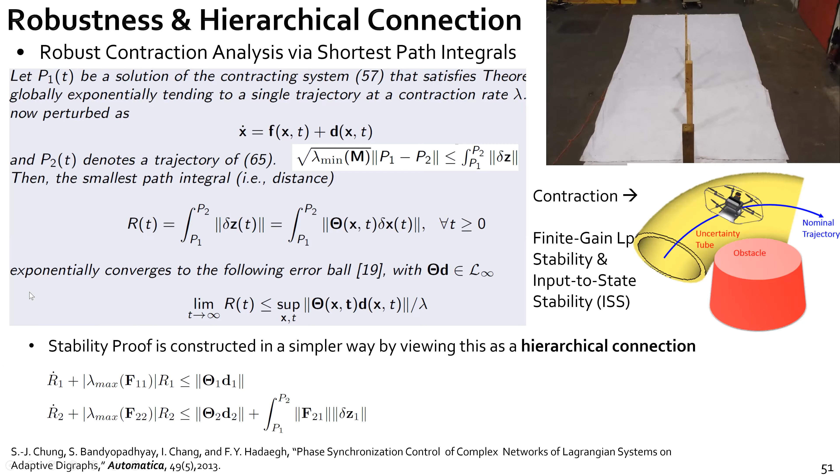And in fact, that's exactly what we're doing. This is actually also involved in the NASA Center Innovation Fund - it's the asteroid redirect mission. Dimotakis, as JPL chief technologist, was spearheading this effort. I was responsible for nonlinear attitude control, and we developed some very powerful nonlinear attitude control.

I want to just mention that essentially it's adaptive control, but integral control can get you that robustness that can carry that.

I'm going to jump past a lot of this. When I look at this like an estimation problem - estimation is basically using sensors, and if you go to the robotics community, they assume you have to use a Kalman filter variation, extended Kalman filter, or for low dimensional state, particle filters. What he found is that you can actually leverage this contraction theory and nonlinear stability analysis to design an observer that can be stable for a variety of nonlinear dynamics and nonlinear systems.

But here is the thing. How can you extend this contraction for the stochastic dynamics? Now you add noise, and your deterministic nonlinear dynamics becomes a stochastic differential equation.

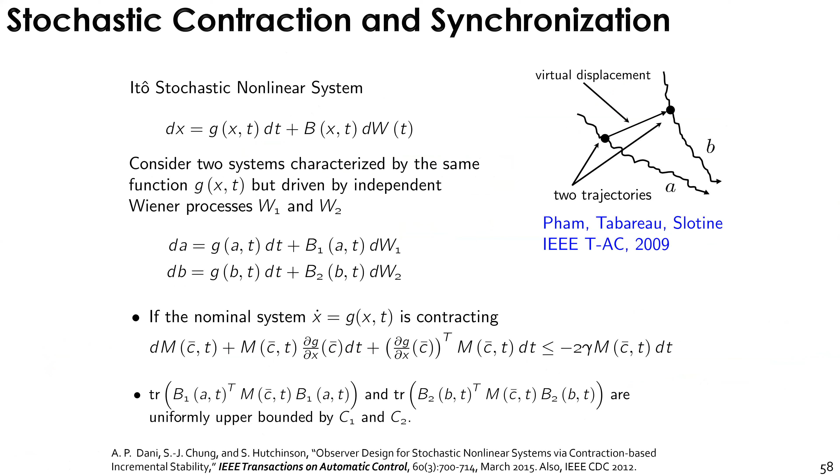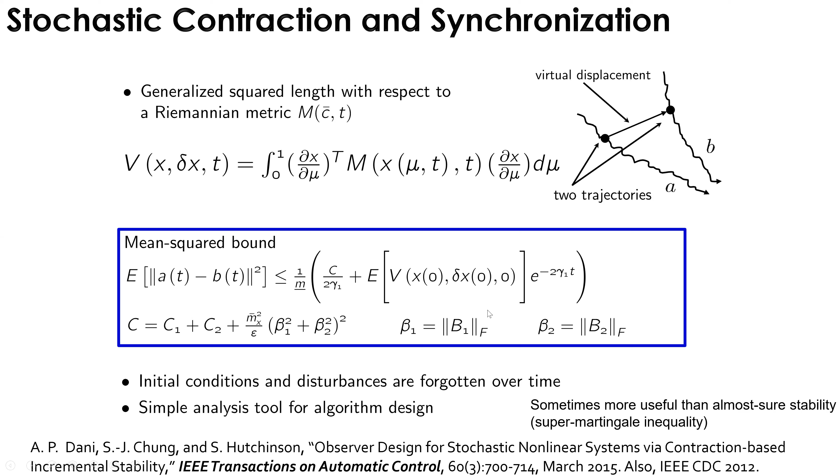What we took here is a very rigorous kind of analysis where you have nonlinear dynamics and deterministic noise, and the stochastic noise essentially is white noise. Here you saw the Ornstein-Uhlenbeck process right there. And you can take this kind of error bound C here, and then try to optimize in real time.

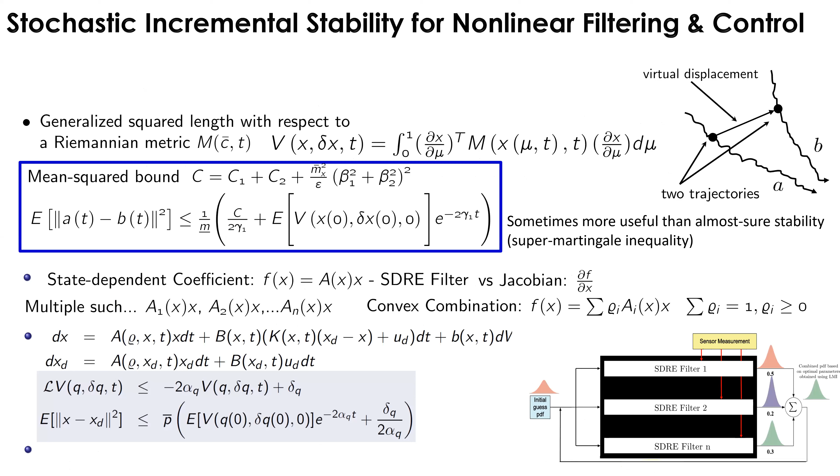So this is actually a departure from the conventional stochastic linear or linear Kalman filtering with noise, or an LQG type of controller, because what you are minimizing here is the steady state error. And if you can optimize that in real time, you can design a very powerful robust controller.

So we designed the robust controller here that minimizes the cost function, and it turns out to be a convex optimization. You can see that it's the nonlinear observer with stochastic noise and so on, because it's an observer problem or estimation problem. You can easily outperform the extended Kalman filter.

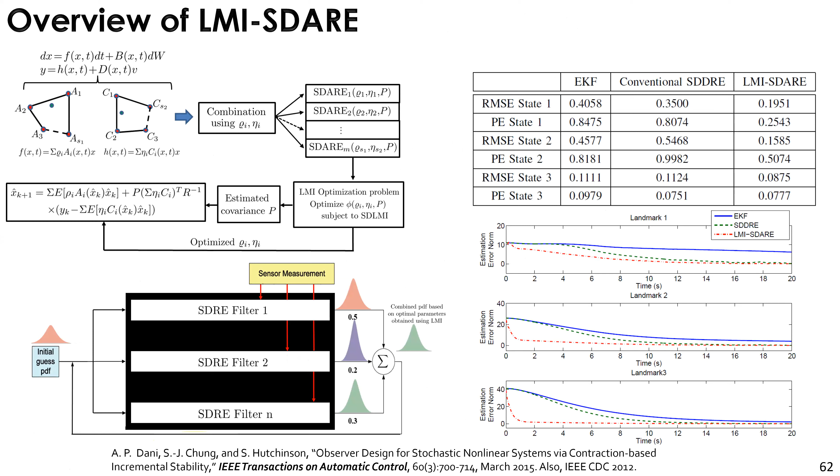And in our new extension with Hiroyasu, in CDC 2019 and Transactions on Automatic Control, we actually improved this cost function and the convex optimization problem, so they can get you better results for both optimization-based control for nonlinear stochastic dynamics and so on.

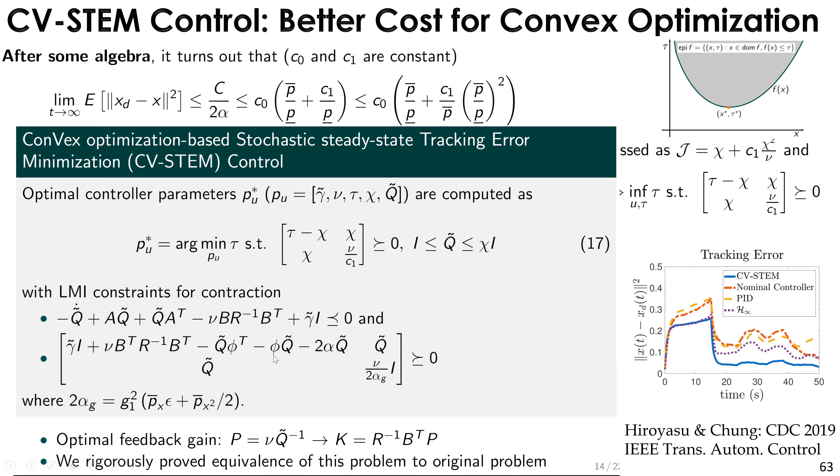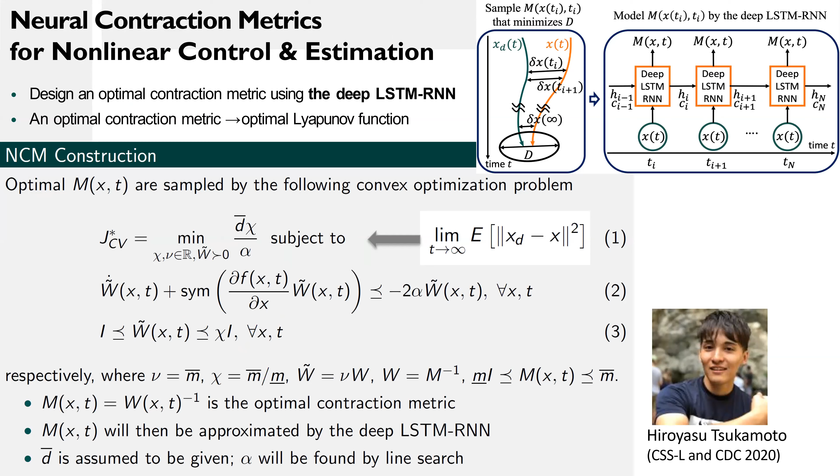I want to quickly mention an exciting new dimension: when I talk about the neural network and stability problem, you can also use a deep neural network here. We are using a deep recurrent neural network, an LSTM, to generate the stability function. You can view this as a control function, but we are essentially finding the contraction metric, this positive Riemannian metric function, to generate the stability proof without solving an optimization problem in real time.

Another extension we are doing, maybe I have one minute: I talked about the stability problem, how you use a deep neural network to prove the nonlinear stability of nonlinear stochastic equations for nonlinear estimation or nonlinear control or optimal control. And also I talked about optimal motion planning and how you use learning to benefit both motion planning and feedback control, like a neural lander.

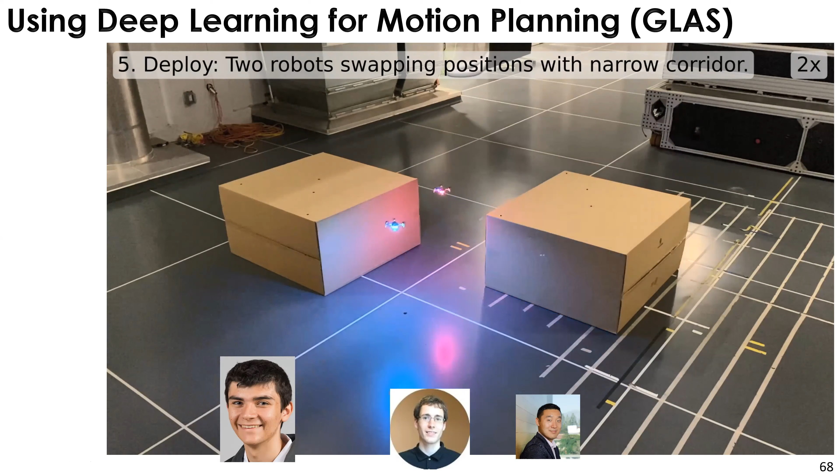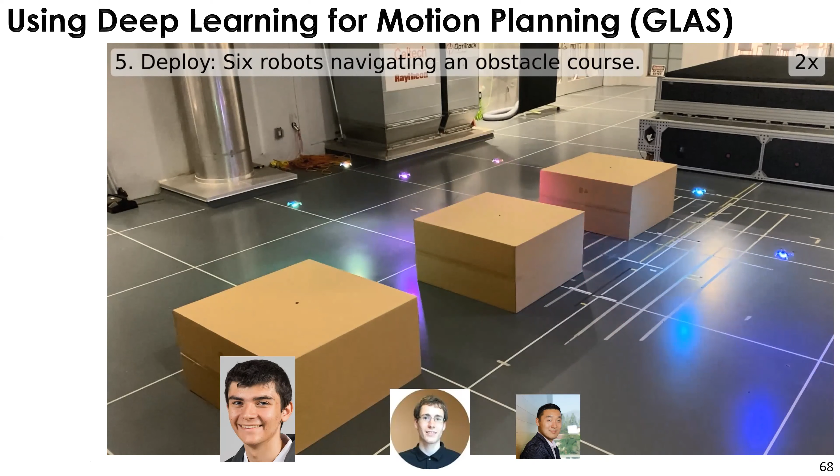So you need to use some local information. So we use both sequential convex programming, a conventional optimal control-based approach, combined with a deep neural network-based approach to do motion planning. This has already been published in the Robotics and Automation Letters.

But the thing is that motion planning is only as good as whatever model you have, so you can improve your optimality, performance, and robustness in terms of collision avoidance and safety-based trajectories using this learning-based method. And obviously learning-based methods will be very beneficial to improve the performance and robustness of very challenging mechanical robotic systems, like a flying ambulance making a landing in the presence of turbulent winds.

So I think in closing, it was a very exciting endeavor to work with the machine learning faculty, robotics faculty, and fluid dynamics experts in CAST and GALCIT. I think we can actually play a very important role in mapping out this future direction of autonomy from the robotics, mechanical, and aerospace fields.